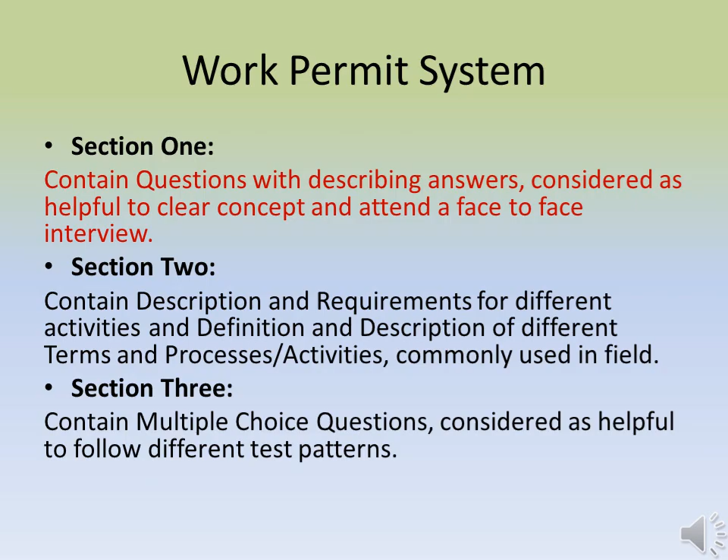Work Permit System Part 2. Section 1. Contains questions with descriptive answers, considered helpful to clear concepts and attend a face-to-face interview. Section 1.

Can an issuer cancel a permit or stop work? Yes, an issuer can cancel a permit or stop work when he finds that the job site does not meet the work permit conditions or any applicable SA safety and health requirement. 33. Can a receiver stop work? Yes, when site conditions become unsafe or he cannot comply with agreed conditions.

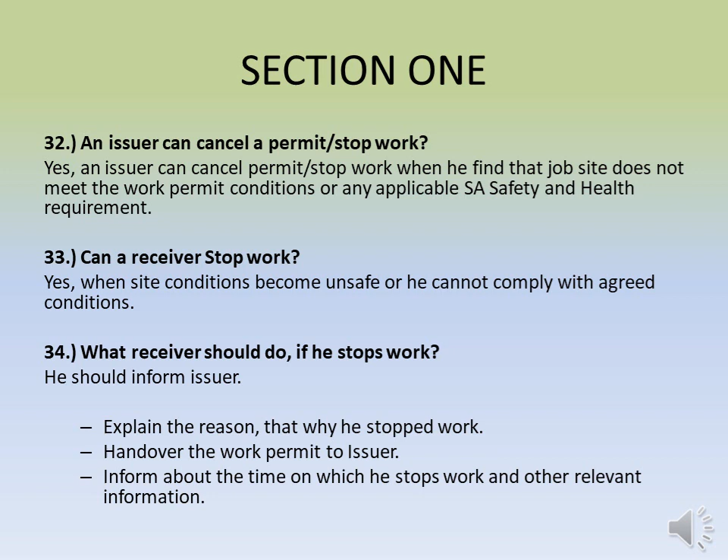34. What should the receiver do if he stops work? He should inform the issuer and explain the reason why he stopped work. Hand over the work permit to the issuer. Inform about the time at which he stopped work and other relevant information.

What conditions lead to cancellation of a work permit? When will a work permit be considered cancelled? In the event of an emergency, all permits will be cancelled within the area affected by the emergency. Additionally, as specified by the incident commander. When a change occurs in the work activities or site conditions that could potentially create an additional hazard to personnel, damage to equipment or facilities, disruption in operation or harm to the environment.

36. When a work permit is cancelled or the issuer stops work, what should he do? After a permit is cancelled or the issuer stops work, he must obtain the work permit. Write on the permit the reason for the work cancellation, the time, and other relevant information.

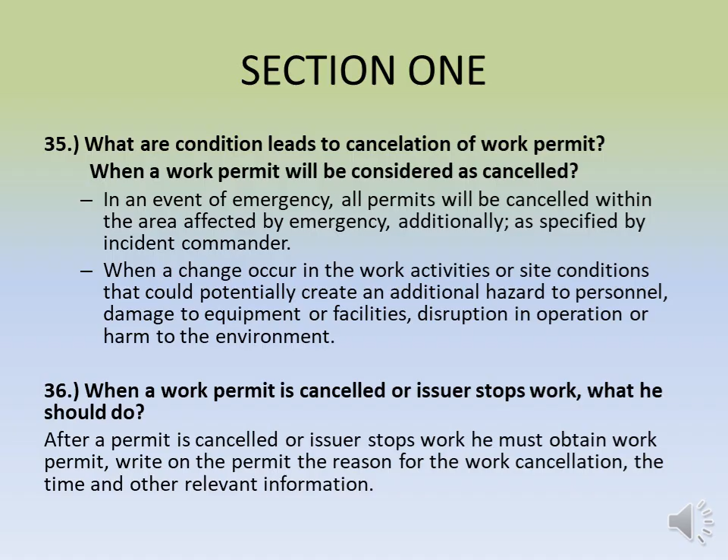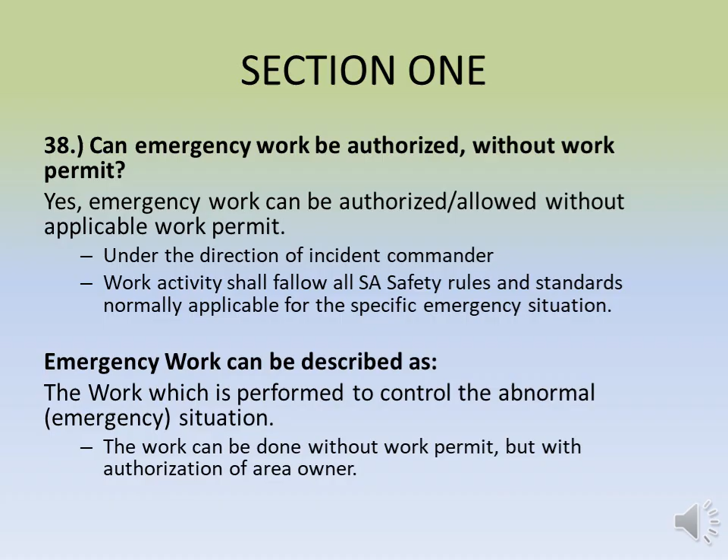Can emergency work be authorized without a work permit? Yes, emergency work can be authorized or allowed without the applicable work permit, under the direction of the incident commander. Work activity shall follow all SA safety rules and standards normally applicable for the specific emergency situation. Emergency work can be described as work performed to control the abnormal emergency situation. The work can be done without a work permit, but with authorization of the area owner.

How is a permit closed? By signing of both issuer and receiver in the closing section of the permit form. 40. When is a permit to be closed? When the work is finished, the work crew has left the area, or the permit duration expires.

41. Is signing the permit the only criteria or requirement to close a permit? Can a permit be closed without signing by issuer and receiver? When distance and remoteness make signing impractical, an alternative closing method is determined and stated on the work permit when it is issued. 42. In what condition is a permit considered invalid or cancelled and work cannot be continued? When the given duration of a permit has expired.

For how long must the original work permit be kept in record, and by whom? For 3 months, by the issuer, the proponent organization. Better if the receiver, the contractor, can keep his copy for 3 months, but it is not mandatory for the receiving end. 44. Who will perform the gas test? An SA certified person. The gas tester can be the issuer, his designated representative or any other person, but certified.

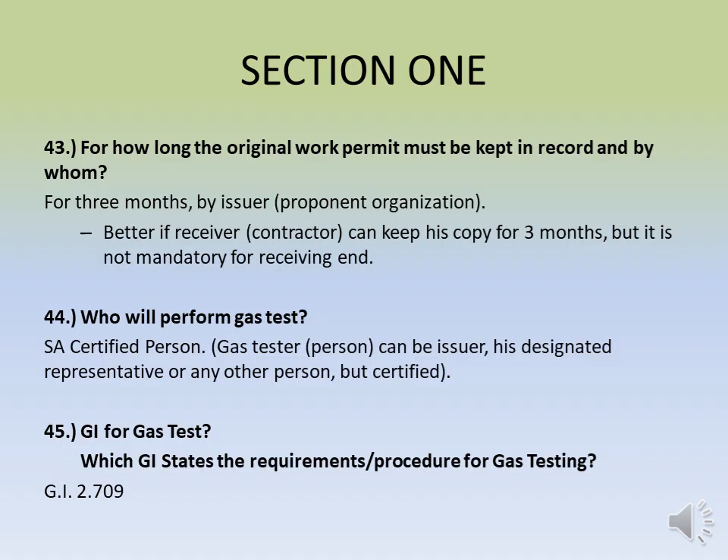45. GI for gas test? Which GI states the requirements and procedure for gas testing? GI 2.709. 46. Is a gas test required for all types of work permits? Yes, a gas test is required for all types of work permits. 47. What is a gas test? It means the atmospheric test. A test to check the presence and concentration, quantity, of different gases in the surrounding air.

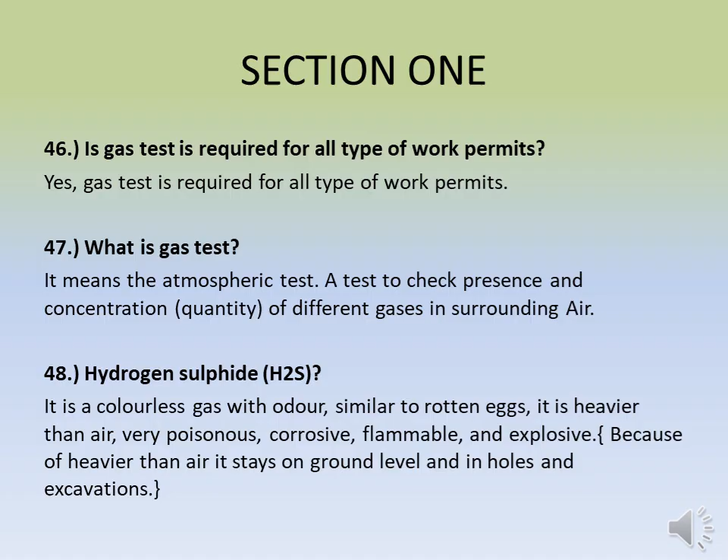48. Hydrogen sulfide, H2S? It is a colorless gas with an odor similar to rotten eggs. It is heavier than air, very poisonous, corrosive, flammable, and explosive. Because it is heavier than air, it stays at ground level and in holes and excavations.

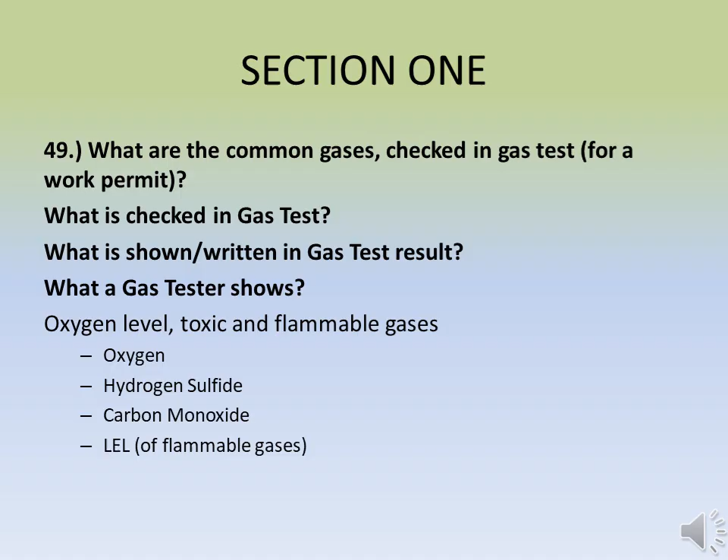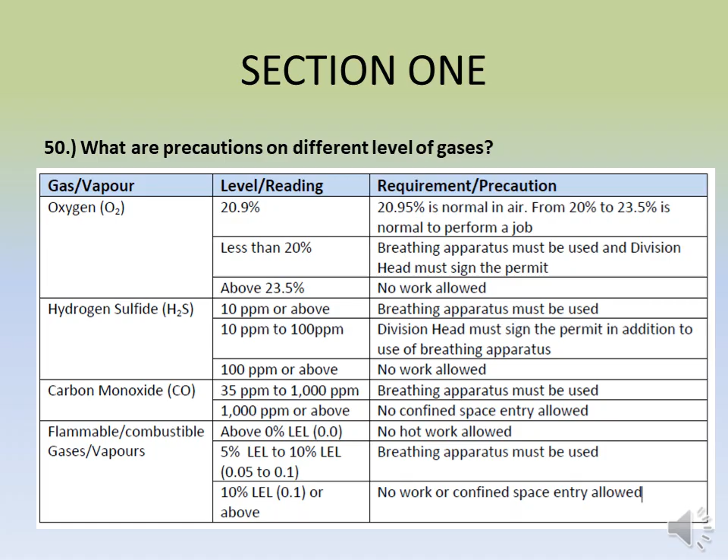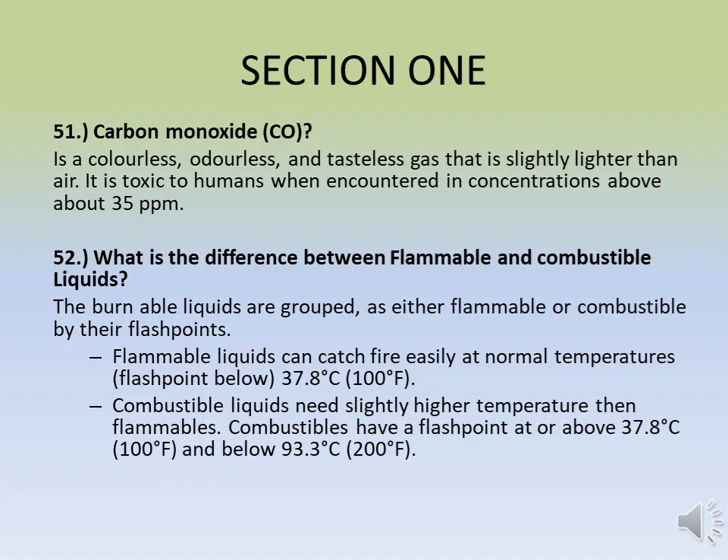51. Carbon monoxide, CO, is a colorless, odorless, and tasteless gas that is slightly lighter than air. It is toxic to humans when encountered in concentrations above about 35 ppm. 52. What is the difference between flammable and combustible liquids? Burnable liquids are grouped as either flammable or combustible by their flashpoints. Flammable liquids can catch fire easily at normal temperatures, flashpoint below 37.8 degrees Celsius, 100 degrees Fahrenheit. Combustible liquids need slightly higher temperature than flammables. Combustibles have a flashpoint at or above 37.8 degrees Celsius, 100 degrees Fahrenheit, and below 93.3 degrees Celsius, 200 degrees Fahrenheit.

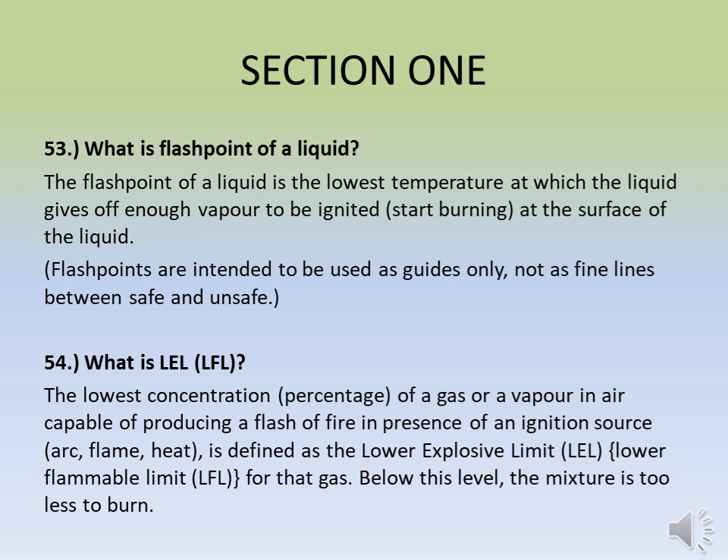53. What is the flashpoint of a liquid? The flashpoint of a liquid is the lowest temperature at which the liquid gives off enough vapor to be ignited, start burning, at the surface of the liquid. Flashpoints are intended to be used as guides only, not as fine lines between safe and unsafe. 54. What is LEL, LFL? The lowest concentration, percentage, of a gas or a vapor in air capable of producing a flash of fire in the presence of an ignition source, arc, flame, heat, is defined as the lower explosive limit, LEL, or lower flammable limit, LFL, for that gas. Below this level, the mixture is too lean to burn.

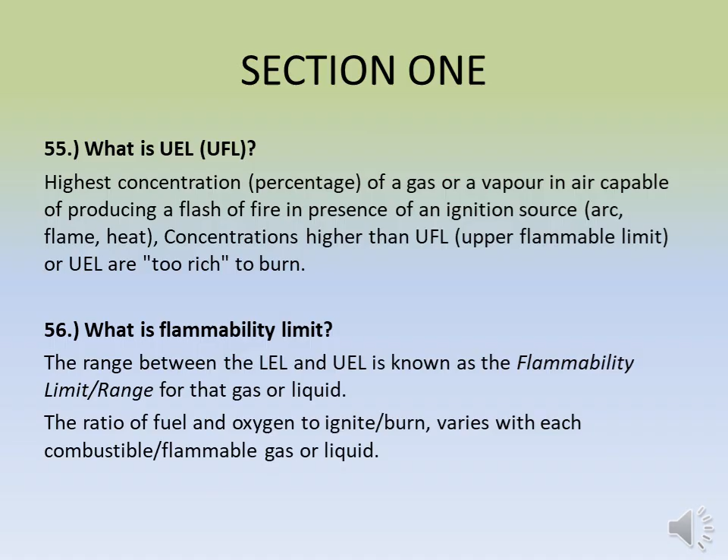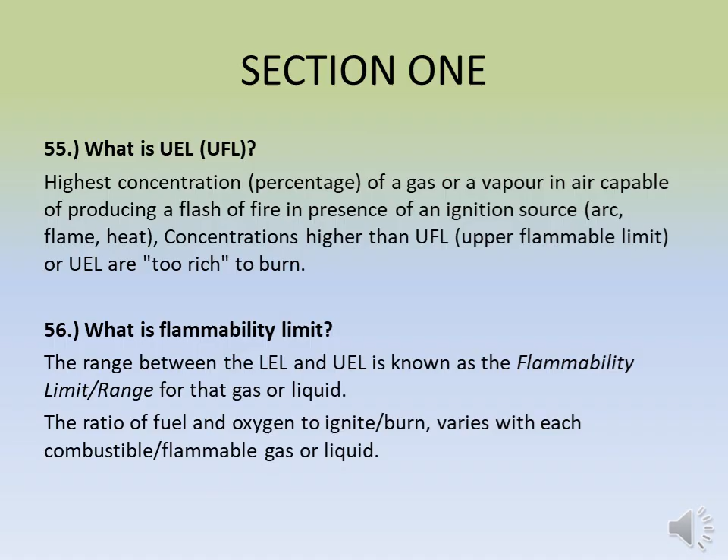57. What is ppm, parts per million? It is a unit of concentration, commonly used for measuring small levels of something, pollutants, in air, water, body fluids, etc. 1 ppm is 1 part in 1 million. The common unit mg/liter is equal to ppm. Four drops of ink in a 55-gallon barrel, 208 liters, of water would produce an ink concentration of 1 ppm. 58. What does percentage mean? Percentage means out of 100, by a specified amount in or for every 100. In mathematics, a percentage is a number or ratio expressed as a fraction of 100. It is often denoted using the percent sign, %, or the abbreviations PCT or PC.

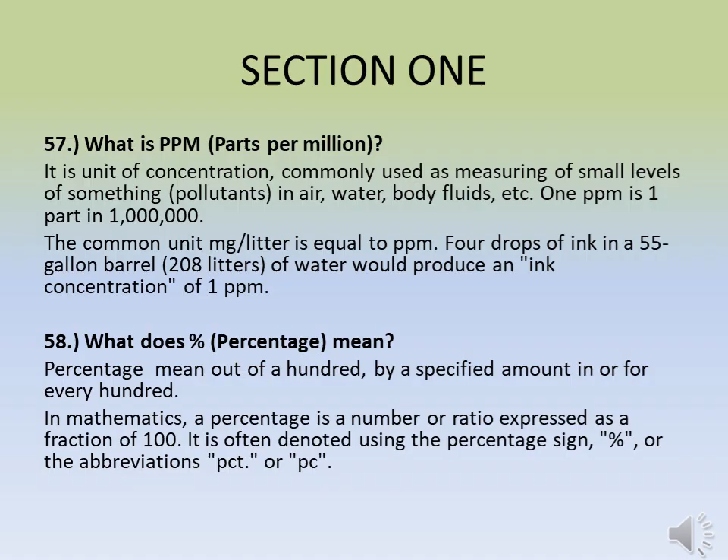59. What is the difference between percent and ppm? There is a fundamental difference between the percentage and ppm calculations, that is the base each of these calculations uses. The percentage uses a base of 100 and ppm uses a base of a million. ppm is used for measuring small amounts in 1 million parts, and percentage is used to show something in relatively high concentration, that is, parts in 100 parts.

60. What has to be checked before working on equipment? The source of energy must be checked to make sure the proper LOTO procedure is followed. The source of energy can be mechanical, electrical, hydraulic, chemical, pneumatic, or any other pressurized or harmful form of energy.